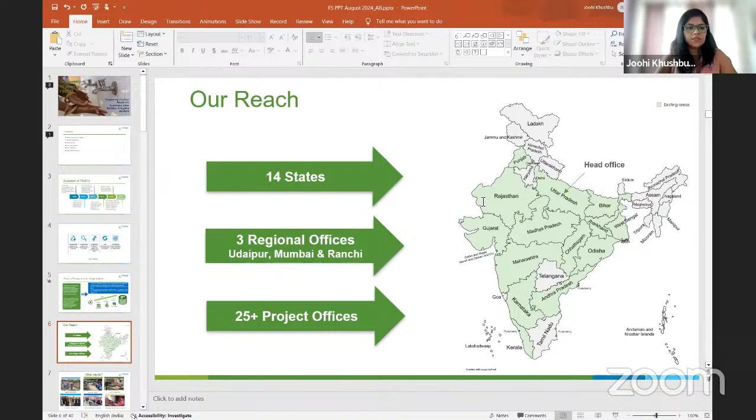So what we do is, as I said, we not only facilitate in constructing individual household toilets, but we also expanded into providing toilet blocks in schools, separate for both boys and girls, and not only toilets but also creating an ecosystem of hand washing and personal hygiene, MHM in schools and also in communities.

We also expanded or diversified our operations in waste management. In waste management, we are doing different aspects like municipal solid waste management, working with ULBs, liquid waste management, drain treatment, lake treatment, grey water treatment, and we provide technical support for developing STPs, sewage treatment plants. Another interesting thing we are doing is fecal sludge management.

An interesting thing we are doing here is collecting household organic waste or animal waste, and mixing it with the human waste coming into the STPs. We treat it into a very nutritive co-compost, which is supposed to enhance soil fertility. This has been tested in several agriculture universities and laboratories for testing and approval, and we have piloted it in some regions of India, giving good results for crop production.

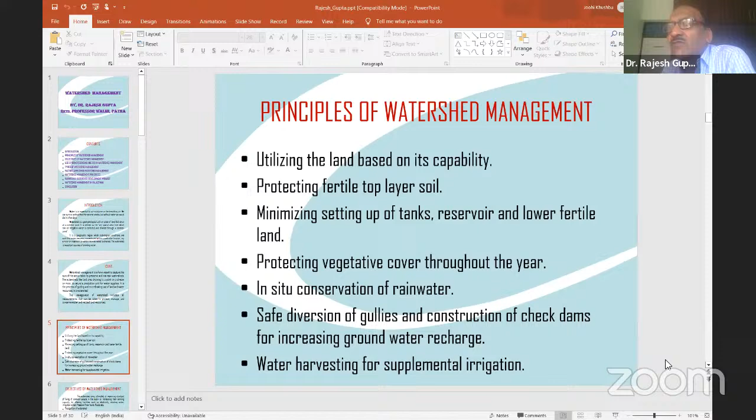Water harvesting is for supplemental irrigation. At the time of rainy season, we get water from the rain, and when it is stored, it can be used at another time.

The watershed aim ultimately is to improve the standard of living of common people in the basin by increasing their earning capacity. Like the Anna Hazare example - before watershed management there was no livelihood in those places, but after storing water, greenery came and livelihood started. For that, the Government of India gave a Padma Shri Award.

Everywhere water is stored, greenery comes up and new avenues are generated. So we recognize the watershed for adequate water supply for domestic, agricultural, and industrial needs, abatement of organic and inorganic soil pollution, and to protect and enhance water sources originating in the watershed, increasing infiltration of rainwater. The main purpose is to increase infiltration - whatever rainwater falls on the ground should be infiltrated into the ground.

Before remote sensing, it was difficult to delineate the watershed because a watershed is a very big entity. With remote sensing and satellite help, we can delineate the watershed - big watersheds contain smaller watersheds, and remote sensing helps us know where vegetation is, where the ridge boundary is, and from where water will be stored.

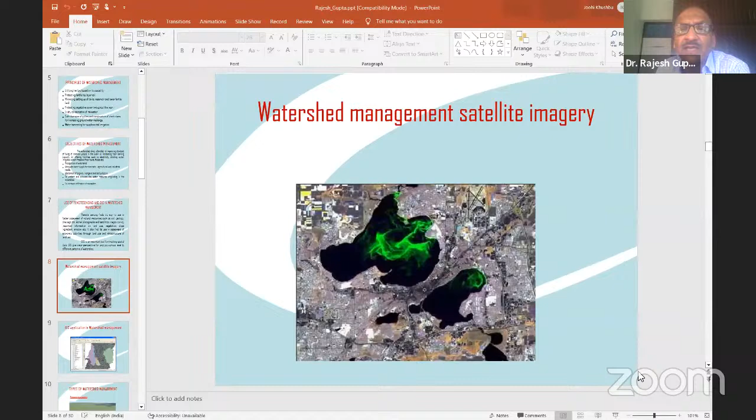With remote sensing and GIS, Geographical Information System, all ground data can be fed in, and relationships between different features can be easily understood. This makes it very easy to know the present position of the watershed. This figure shows remote sensing data - the black area is the water available at that place.

This is the grassland development. First, we have to develop the grassland. As we increase the grassland, the water infiltration capacity will increase tremendously. So we have to increase the grassland, either manually or otherwise.

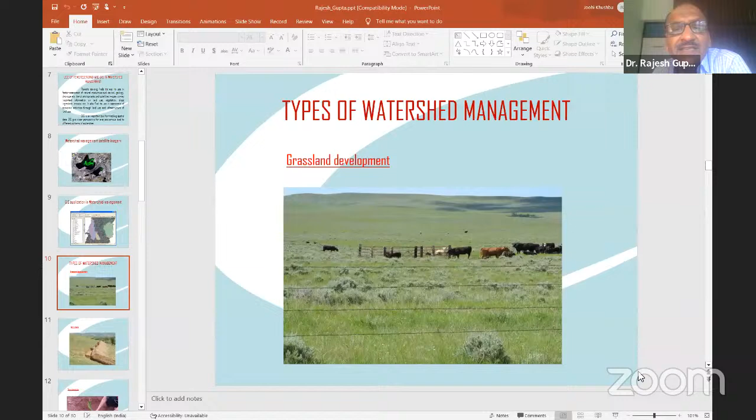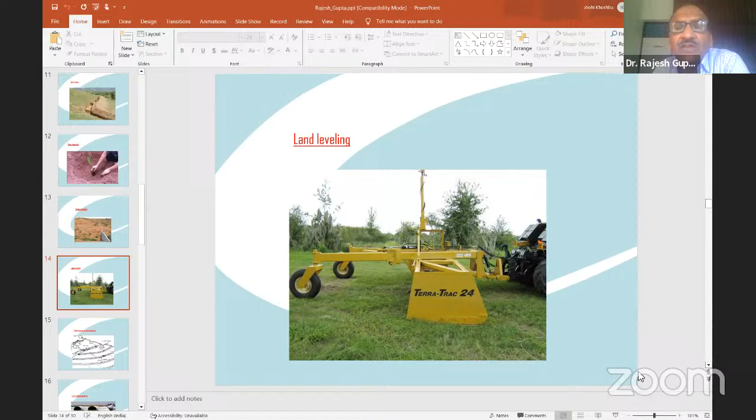Next, this is planing, this is land leveling. When there is an undulation of land, we use a tractor to level the land and maintain this level.

A watershed has different characteristics: size, topography, soil relief, climatic conditions, watershed operation, land use pattern, social status of inhabitants, and water resources and their capability.

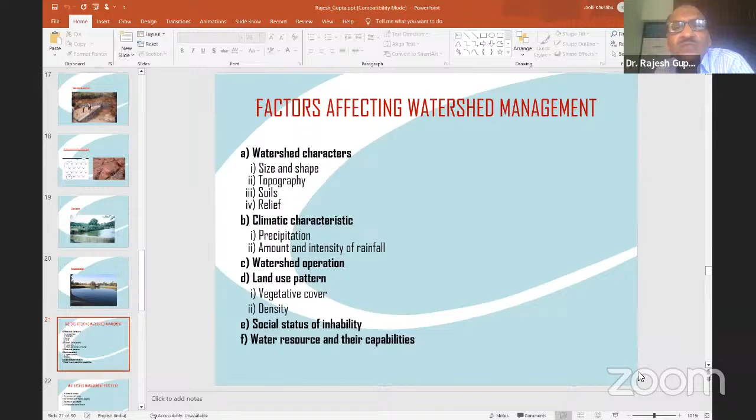When we study the watershed, we consider the purpose for which we are using this water, whether to increase infiltration, to increase water holding capacity, or to prevent soil erosion. For all these, different methods have to be used.

Suppose that is a vegetative measure. You have to provide some vegetative measure so that the watershed's water table increases. Strip cropping has to be done, grassland farming has to be done. Woodland engineering measures, some structural measures such as check dam, gully plugging, contour bunding, terracing, construction of earthen bank, and construction of check dam, anything which can be done so as to retain the water in those places.

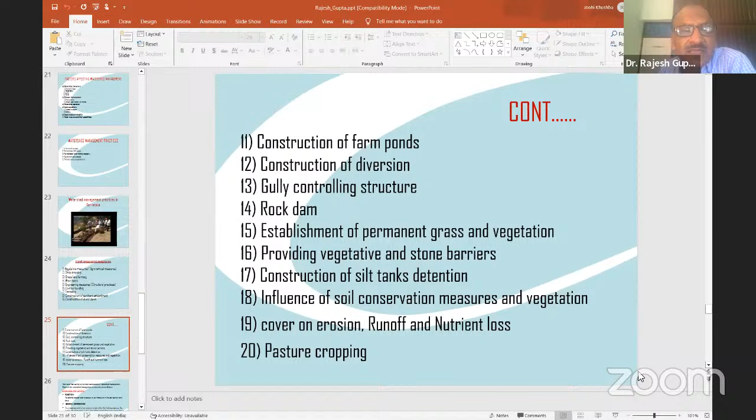Construction of diversion, gully controlling structure, rock dam, establishment of permanent grass and vegetation, providing vegetation stone barrier, construction of silt tank, influence of soil conservation measures, cover on erosion, runoff and nutrient loss, and pasture cropping, to control the erosion and to conserve soil moisture during the rainy season.

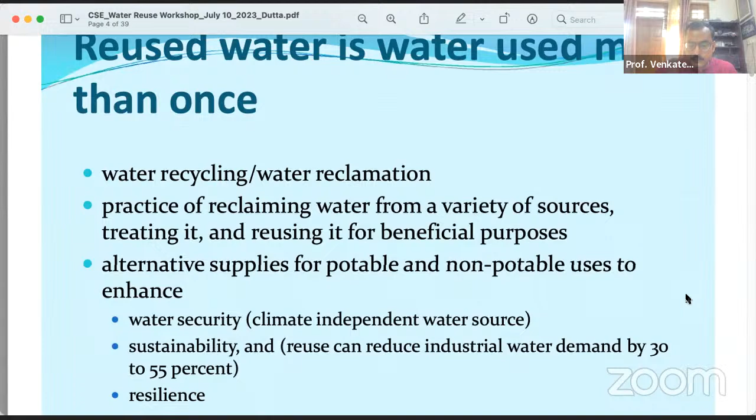There is a famous quote by Dr. Lucas, who was at the National Institute of Water Research, South Africa. He said that water should not be judged by its history, but by its quality. Because water is coming through various sources, we should not know from where it is coming. Especially in many places, if you tell someone this water is sewage, now you are drinking that treated water, it matters. So he's saying water should not be judged by its history, but by its quality—the quality and wholesomeness of water that you have in your tap, or when you go swimming, bathing, or for any recreation. You should know that this water has passed through multi-barrier systems before coming to this place.

It is also very important that most of us are a downstream community. For example, Agra and Delhi: Delhi is upstream and Agra is downstream. So whatever Agra people are getting, they are getting the wastewater of Delhi in the Yamuna River. The freshwater inputs are very less. So in Agra, what you see is the discharge of all those big drains, especially in the lean season. The quality of water is all dark, black water, sewage. So if you ask, everybody is a downstream community. If we are upstream, we are lucky because we get water from somewhere else.

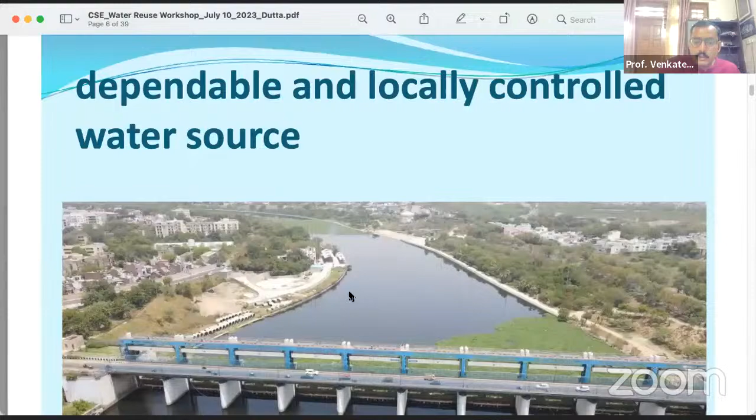So there are many cases of water reuse. Some happen through planned ways, and some happen unplanned, unintentionally, like the example I showed you here, where wastewater is going downstream and becoming the water source for someone else. This is unplanned water reuse, where the source of water is substantially composed of previously used water, such as when communities draw their water supplies from rivers like Gomti and Yamuna, or use water intake for irrigation from the Kali River. A lot of water from the Kali River in Meerut and other places in Western UP, the Hindon River, Kali East and Kali West, this dirty, polluted water is being used for irrigation by local farmers. That is an example of unplanned water reuse.

But there is also planned water reuse, where the water system is designed with the goal of beneficially reusing a recycled water supply. For example, a dual water supply with indoor reuse such as toilet flushing. Many colonies have dual water supply where reclaimed, reused water is used for flushing toilets and for landscaping and gardening. Similarly, there are colonies where lake restoration is done using reused water. In Dwarka sub-city in Delhi, there's a lake project where discharge from the Dwarka sewage treatment plant feeds the lake, and even in NCR, Haryana, some lakes are being fed by treated wastewater. This is a very good example of lake restoration. We are also trying to revive some old channels of rivers by putting in treated wastewater. So there are many examples of using reclaimed water to revive the ecosystem.

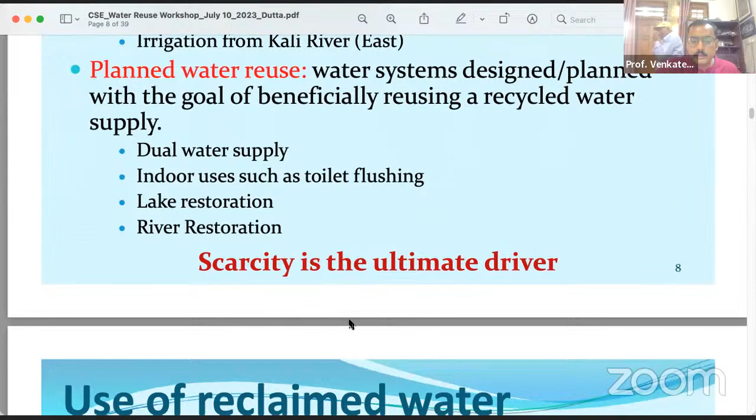Basically, scarcity is the ultimate driver of water reuse. Whenever there is water scarcity, there is a tendency to use that water. So I'll show you some examples of where we are using reclaimed water, and we did some work on the cost, the benefit, the health hazards and uses, and also the public acceptance.

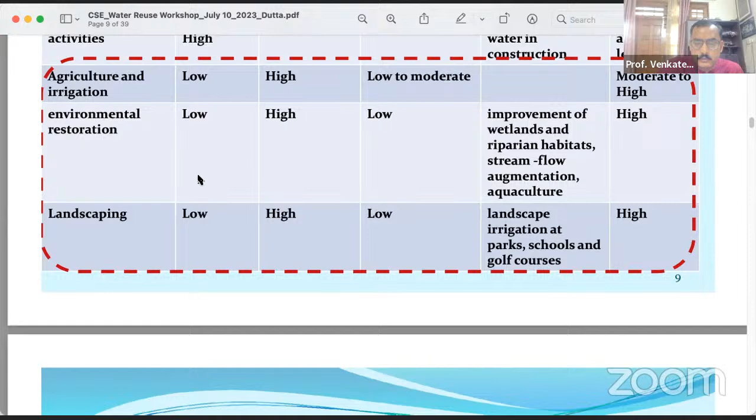If you see this table, potable water supply has a very high cost and very low public acceptance. Groundwater replenishment, when we recharge with treated wastewater, has a very high risk of pollution and high health hazard. I would not recommend using treated wastewater to replace groundwater; it is very risky. Some managed aquifer recharge is done in the US, but that is a highly controlled system. In India, many people are doing it, but I would say this would pollute the aquifers. In industrial processes, the cost is high but health hazard is very low, and we use it in power plants and refineries. For construction activities in NCR, we use treated wastewater for building purposes, though there's low acceptability due to absence of legislation. But three applications are very important, where the cost is low and public acceptability is high: agriculture, environmental restoration and landscaping. There's a huge scope of reusing treated wastewater in these three sectors, and the health hazard is also very low to moderate.

I've tried to show this with cost figures also. Ventures like potable water supply and groundwater recharge are costly, but for these three sectors, the health risk is less and the cost is also less. So we could go for these three.

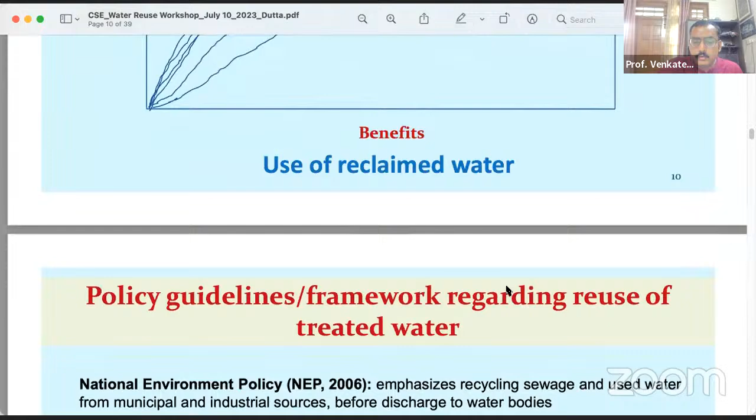I'll quickly touch upon the policy guidelines for water use in India. We had the National Environmental Policy introduced in 2006, which emphasized recycling sewage, but it had no building blocks. This was followed by the National Water Policy, which also mentioned using treated wastewater for non-potable purposes like irrigation, industrial processes and cooling, but again there was no supporting legislation or building blocks. Then the Ministry of Urban Development introduced a model water reuse regulation, which was very important. This regulation sought safe and sustainable water use, focused more on urban areas, and outlined standards and guidelines for the treatment and reuse of wastewater. It provided a framework for regulating and monitoring water reuse practice. So for the first time, in 2018, we came out with a very clear-cut guideline and standards, but again it was not very specific to industries.

Then there was the service level benchmark, SLBs, by MoHUA, Ministry of Housing and Urban Affairs, which mandated around 20% compulsory reuse and recycling in urban areas. We set up the benchmark that at least 20% of sewage should be reused in urban areas, and this is being followed in master plans of upcoming cities. We are also gearing up to meet this requirement. Like in Lucknow, we are making a plan for reusing at least 20% of recycled wastewater.

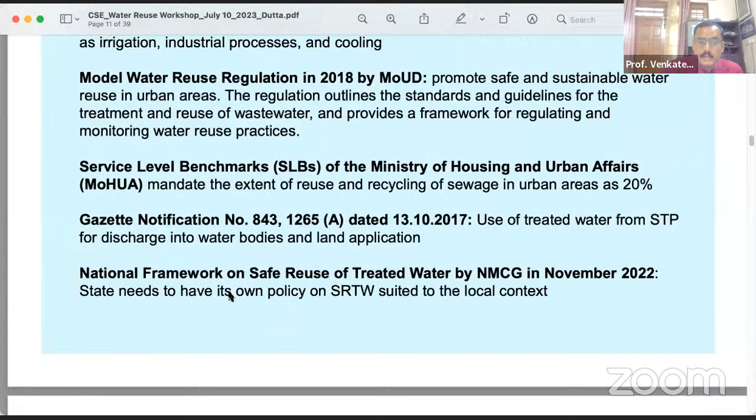Then we had a very important gazette notification in 2017, which mentioned the use of water from STPs for discharge into water bodies and land applications. This was very important, and we are using this gazette notification frequently for reclaiming and restoring our rivers and water bodies, because this was the only regulation wherein we could use treated wastewater from STPs for our lakes and wetlands. Otherwise, even the CPCB will not allow using treated wastewater for lake reclamation.

Then in November 2022, there was a very nice national framework on safe reuse of treated water by NMCG, National Mission on Clean Ganga. And now states are making their own policies, the safe reuse of treated wastewater policies, based upon these recommendations.

There was this advisory by CPHEEO, Ministry of Urban Development, in August. This is a very important advisory. It said to impose a ban on use of potable water for purposes other than drinking, and introduce a new workable system to restrict use of potable water for drinking only. Use of water for all other remaining purposes, to the extent feasible and not detrimental to human health and well-being, has to be made available through recycling and reuse processes, and should be augmented in a big way to meet the existing growing needs of urban clusters. So for the first time, there was this advisory on conservation and restoration of water bodies, and it said to impose a ban on use of potable water for non-potable purposes.

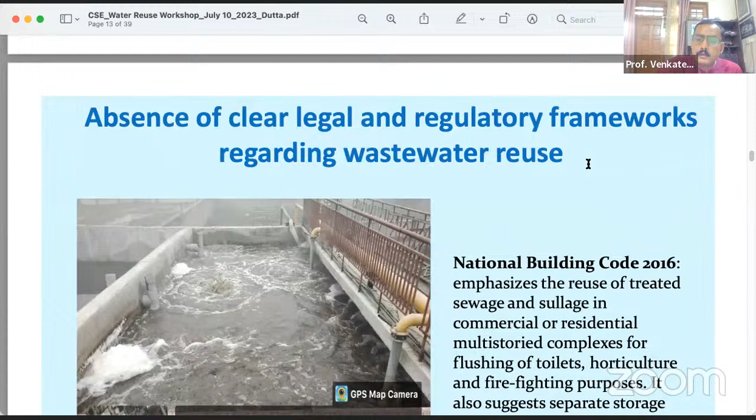Earlier, there was a clear absence of any legal and regulatory framework, but now slowly we are bridging this critical gap between policy and practice, between the legal and regulatory framework and the actual on-ground situation. So we had a national building code.

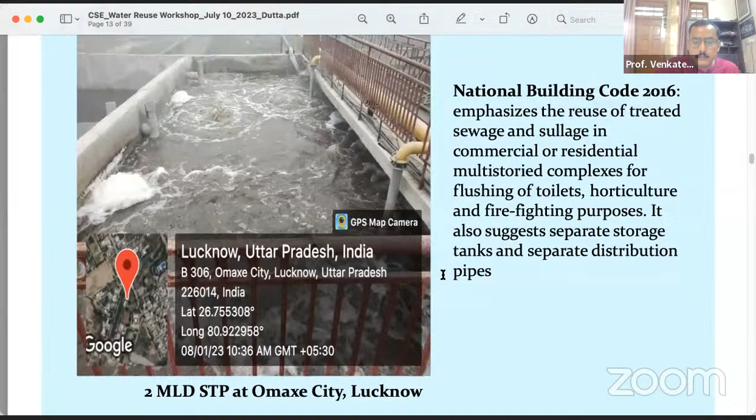The NBC emphasized reuse of treated water for firefighting. This is an example from where I stay, in Lucknow. We have made a 2 MLD STP, and this STP's treated wastewater is being used to discharge into this lake. Of course, now it has been stopped for the last year because the STP is not working properly, the builder is just dumping it into a nearby drain. So we have complained about it. But earlier, there was a very nice system of discharging this 2 MLD wastewater into this reclaimed lake.

So lastly, we have to work on technology that works, technology that promotes safe, reliable and cost-effective reuse of wastewater. The scale is very important, the quality is important, and so is the capital cost for installing and the O&M cost. We have to look for certain financing because the return is delayed. We don't get immediate return, but the benefit you get is very high. There are some risks like cross-contamination, but we are working on those risks as well through a multi-barrier treatment approach.

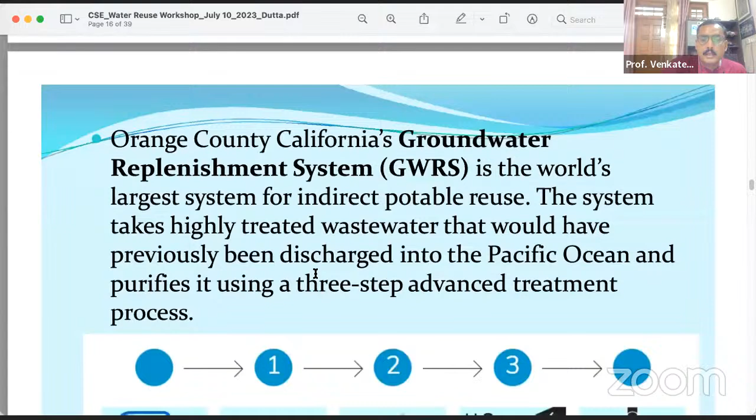So here are some examples. The Orange County in the US, where there are multiple systems of treatment: pre-purification, then microfiltration, RO, then UV, and then it goes to water delivery. This wastewater is used for drinking, and there is no incidence of any pathogen outbreak. People enjoy drinking the treated wastewater because it passes through a very strict treatment protocol.

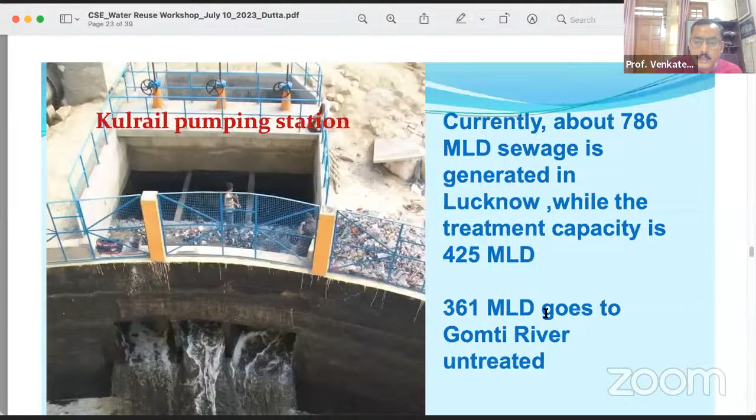So here are some examples of what we are doing in Lucknow. We are using stream augmentation. This is the Kukrail River. We are using treated wastewater from the STP, the Kukrail pumping station, where the water is diverted to the Bharwara sewage treatment plant. But currently, about 361 MLD goes to the Gomti River untreated, which is of course under process.

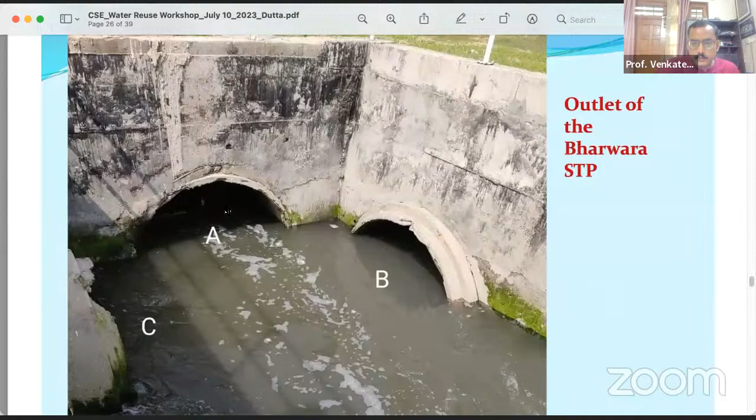This is the Bharwara treatment plant. There are 3 units, each around 115 MLD, so 345 MLD of wastewater goes through these treatment units, and this is the outlet of the STP. But the outlet quality is still not so good. You see, this is the place where they mix the water into the river, and there's a lot of froth formation.

Even this is at the outfall, because there's so much of nutrients in the wastewater. Even our treatment plant is not able to treat it properly, and here we need a solid technology intervention where we could get rid of the nutrients and phosphates, which result in this froth formation. All those surf detergents that we use, the surfactants, lead to a lot of froth formation. So treated water being discharged to the Gomti River is not of good quality.

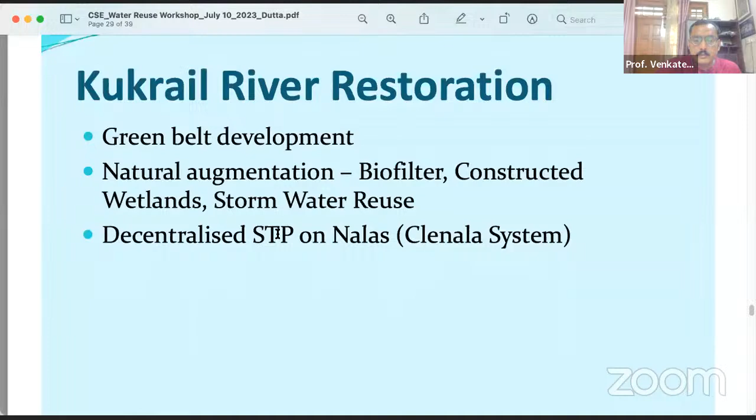So these are examples of using reclaimed water. We have designed a Clenala system, putting STPs on the nalas, using biofilters and constructed wetlands, and reusing it to reclaim these channels. So these are some of the pictures.

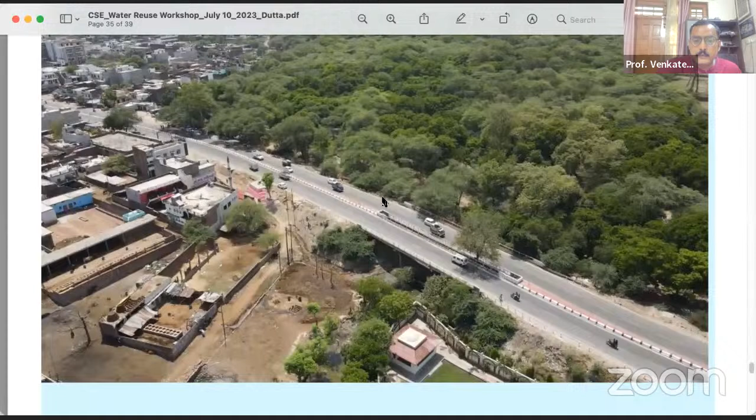This, of course, has now been removed. This is Akbar Nagar 1 and Akbar Nagar 2. This was the settlements on the floodplain of the Kukrail River. This is now there—this is the original patch in the Kukrail forest. We are trying to put all this natural vegetation across the banks of the river. This is the place where the Kukrail River comes from, the Kukrail forest.

So there are 5 major challenges. One is the cultural and social acceptability of treated wastewater, the health concerns, the infrastructure, and the technology challenge—how do you take care of complete treatment like Orange County is doing in California.

So we don't have enough money—the financial sustainability is very important. And finally, legal and regulatory challenge, which mandates compulsory water treatment and reuse through a multi-barrier approach, and also enforces proper implementation mechanisms.

So what needs to be done? Establish differential quality standards fit for the purpose of end use, which is not there. Develop state policies and municipal regulations. Right now only 10 states have drafted their policies. We are drafting for UP as well, with clear-cut standards, and develop markets.

This is very important—unless there is a market for reclaimed water and incentive compliance, your whole structure would collapse. So how to develop that market? Like in NCR, there is a market for treated wastewater for buildings, because it was mandated by law that you can't use fresh groundwater for building purposes. So you have to have treated wastewater. There are fleets of tankers that get treated wastewater from the treatment plant and distribute it to the builders.

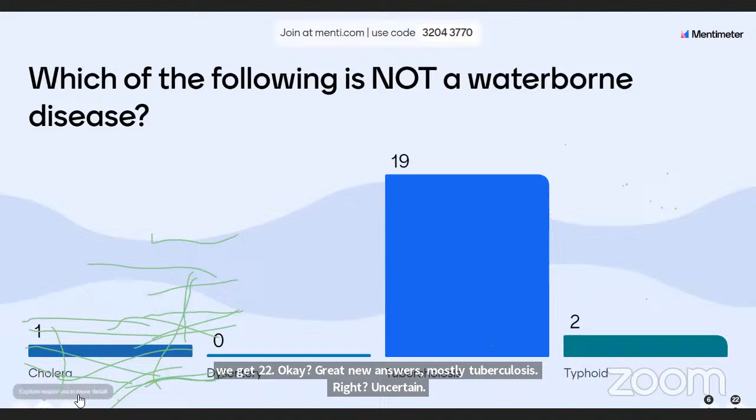Okay, great. New answers. Mostly tuberculosis, right answer. So tuberculosis, most of the people have answered right. So this is, we at least know, like wash का हो रहा है तो at least ये पता होना चाहिए। So yes, water sanitation. So good, good, very good. Thank you. Next question, Anil ji.

अच्छा. So what is the term used for the process of removing harmful substances from wastewater? जो अभी वेंकटेश सर ने जो बोला, जो डॉक्टर गुप्ता ने भी जिस पे हाईलाइट किए थे कुछ, सो प्रोबेबली इफ आई एम नॉट रॉन्ग इन सम केसेस, सो वेस्ट वाटर मूवमेंट को क्या बोलते हैं हम लोग? रिमूवल ऑफ हार्मफुल सब्सटेंसेस फ्रॉम वेस्ट वाटर। ओके, ट्रीटमेंट, फाइन, ठीक है। 5 आंसर्स आ गए, ट्रीटमेंट। 6 काउंटिंग, ओके, 9।

क्लोरोनाइजेशन। आई डोंट नो, आई मीन लेट्स सी, वो देखते हैं। I mean, let's see what the answer might be. Okay, 15. Great. Very quick. अभी तो आपको you should be in the mood of the game. अब आपको क्लोरोनाइजेशन, just I don't know. I mean, I will देखते हैं। तो एक बार 20, 21 responses, 22 responses we are getting।

ओके, 18 पे स्टक हो गया, ठीक है। बाकी कंफ्यूज है शायद। 19, 20, अच्छा ओके ओके, यस श्योर हो रहे थे। Okay, 22. Okay, so we get most of it. So 18 says treatment, and I would say the right answer is treatment. Yes, of course. Yeah, treatment. So we can move to the next question.

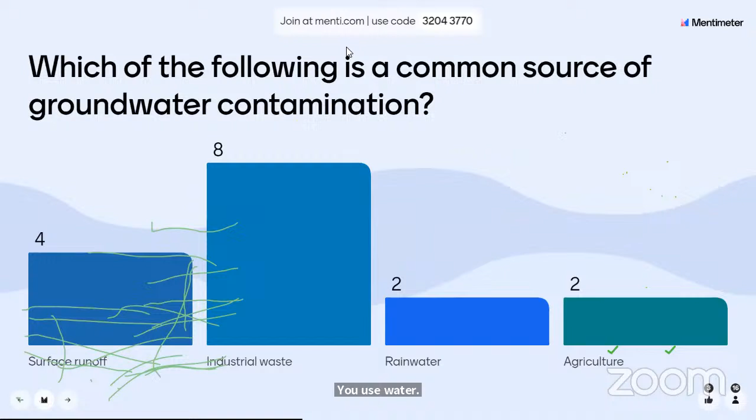We register that, thank you. Rajendra Nayak ji says surface water, okay. So what we can see is we have received 21 answers and majority have answered it rightly - industrial waste. Because we have learned that rainwater is actually required to go into the land, which was all about Dr. Gupta's presentation, how rainwater should go into the land and how we can recharge the groundwater. So that is it - industrial waste is the right answer. We can move to the next one.

Which country has the highest number of people without access to safe drinking water? Safe drinking water, mind it - access to safe drinking water among these four. Sorry, without access to safe drinking water. Very sorry, without access to safe drinking water - those who do not have safe drinking water. Someone thinks it's China. So we think China probably has better development standards, but yes that is there - that is also very questionable. But then again, okay.

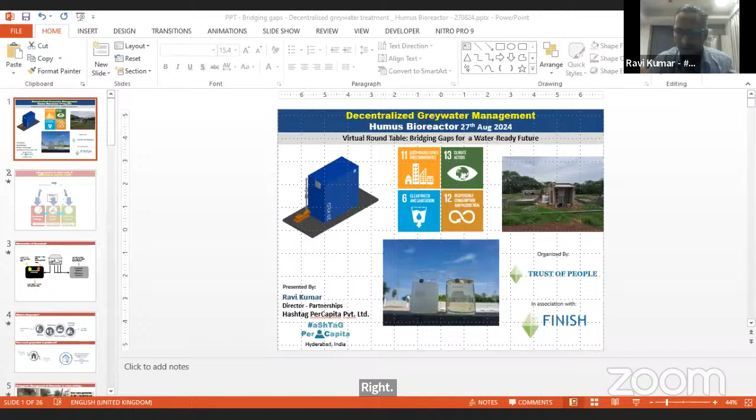Yeah, thank you. So thank you, Finish and Trust of People, and Chandra sir, for following up and wanting us to be in this event. So I'm Ravi Kumar, and Ms. Juhi has already introduced me. Today I will be speaking about decentralized grey water management. I'll start with the basic concept of grey water management - what is grey water and what's happening currently with it - and what our treatment solution offers for grey water treatment and reuse. So that will be the broad overview of my presentation today.

Yeah, I'll proceed with it. So we have wastewater, which of course has many sources like domestic, industrial wastewater, agricultural runoff and others. For today's presentation, I'll be specifically talking about the wastewater coming out of households, which is also termed as domestic wastewater.

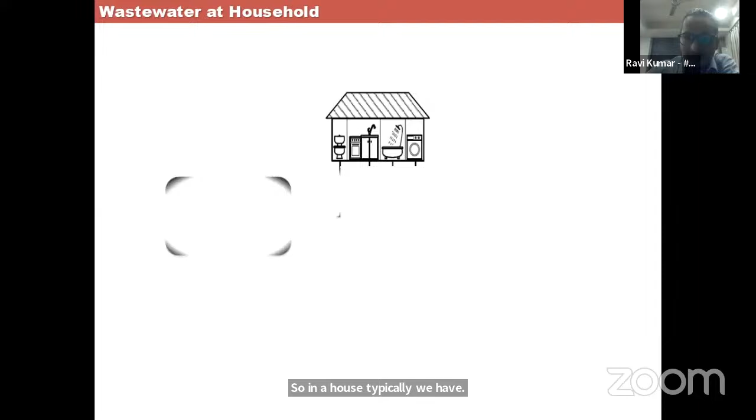In a house, typically we have two types of wastewater generated. One is from the toilet, also termed black water or toilet wastewater. What does it contain? It contains 1 to 2 liters of urine per day per person, and fecal matter of 100 to 400-500 grams, depending on the country.

Apart from this, we have the flush water from pour flush and other flushing systems. Depending on the system, 10 to 25 liters is typical for Western toilet flushing, and pour flush uses less volume. The other wastewater, from kitchen, bathroom, and laundry, is termed grey water.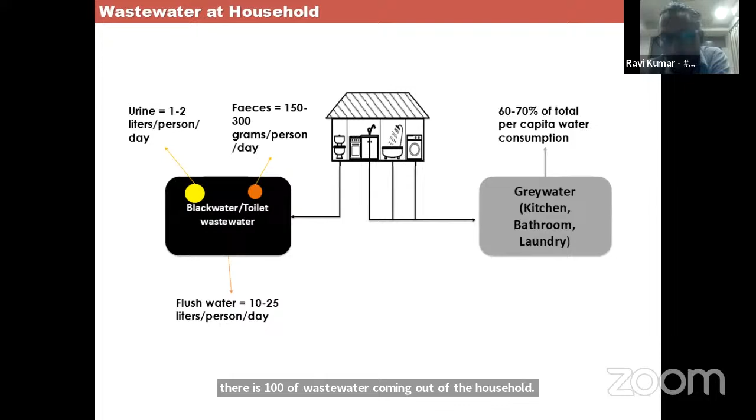If there is 100 liters of wastewater coming out of a household, 60 to 70 or mostly 80% of it would be grey water. The wastewater from kitchen—cleaning utensils, wash basins—and from bathrooms and washing clothes and utensils, is termed grey water.

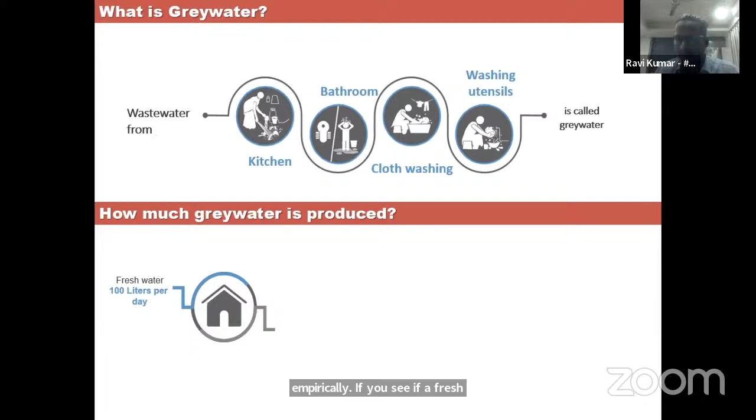How much is produced? It's not a clear measure, but empirically, if 100 liters of fresh water is supplied per day per person, approximately 70 to 80%, or 60 to 70 liters, will be the grey water generated.

It is estimated, according to sources from the central government, the Swachh Bharat Mission, and Grey Water Management in Jal Jeevan Mission, that the amount of grey water generated in rural India is about 15,000 to 18,000 million liters. That's a huge volume.

This grey water is less contaminated compared to toilet wastewater, because most pathogens and organic matter entering wastewater come from toilet wastewater, which has a lot of fecal matter containing pathogens and organic matter. But grey water also contains some organic matter from the kitchen and some sodiums and other contaminants from washing clothes and utensils.

So what is happening currently? Where is our grey water going in our cities, villages, and other areas? The wastewater is basically getting into open areas wherever there are no drains, or wherever drains exist but are not connected downstream to any treatment system. Generally they end up in open water bodies, getting collected in open areas or water bodies.

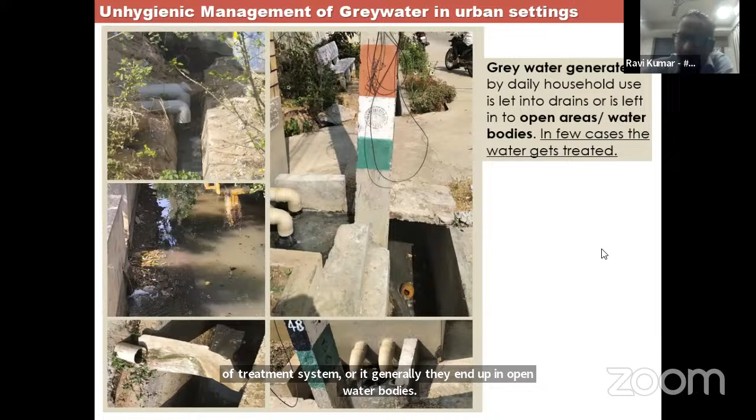Once it gets collected downstream in open areas, especially in our cities, we have issues with mosquitoes and unhygienic conditions. Sometimes the site turns anaerobic and starts smelling. Most of our drains, along with grey water, storm water, and solid waste, get accumulated and create a lot of menace. This has caused a lot of issues.

Just before the rainy season, or once the rains come in India, we have dengue, chikungunya, malaria and all. I was also affected with chikungunya from mosquito bites. It's not that there's water right around my neighborhood, but stagnant water in our surroundings causes a public health issue. It has to be ensured that the water gets treated and doesn't accumulate in our areas.

In most cases—so the picture on the right here, we are doing a lake project in Chitradurga, Karnataka. What we have seen is all the stormwater drains are ending into downstream lakes or rivers. In some cases, the grey water is mixed with the storm water; in other cases, it runs separately.

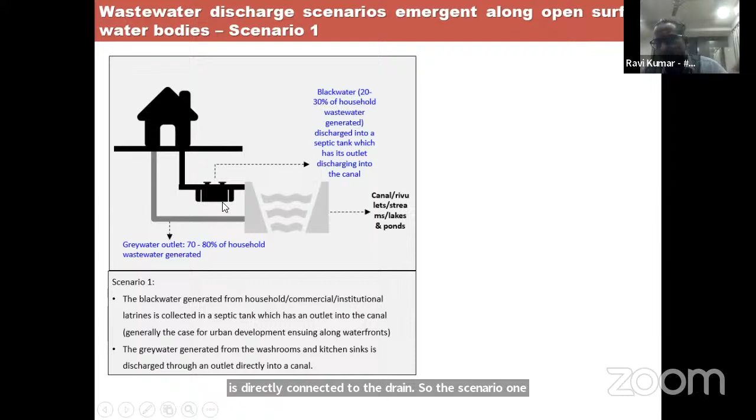All the gray water and black water is collected in a sewer pipe, and from here it goes to a centralized treatment system, a sewage treatment plant. From there it gets treated, and in some cases - though I think the reuse percentage, as Professor Venkatesh Dutta was mentioning, is quite less in the Indian context - there are some reuse cases as well. All the wastewater gets collected at a centralized location with a sewage treatment plant, gets treated, and is disposed into rivers or streams, etc.

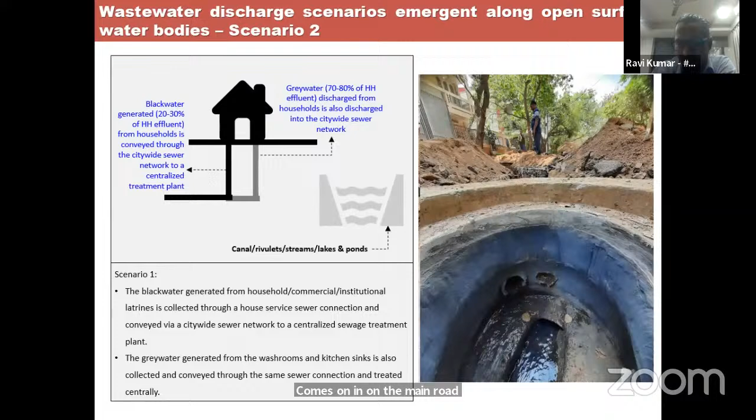There is another scenario which is very prevalent, and I don't know the exact numbers because the scale is huge, where all the black water and gray water end up in open drains. These drains end up in downstream water bodies - lakes, ponds, rivers, whichever path the water takes downstream. So these are the kind of scenarios: centralized systems, gray water collected directly into the drain, or black water into the pit. The third scenario is where both gray water and black water enter open canals and water bodies.

I'll try to give you what could be the approaches for these kinds of scenarios - this is a very generalized one, it can be applied anywhere, not specific to any treatment technology. In the existing scenario, all the gray water is directed into the drains and mixes with solid waste. It either collects there during the dry season, and once there is heavy rain, it gets washed away into downstream water bodies, or it causes flooding - all the drains overflow in the rainy season. In the dry season, solid waste collects, leading to mosquito breeding and other health issues.

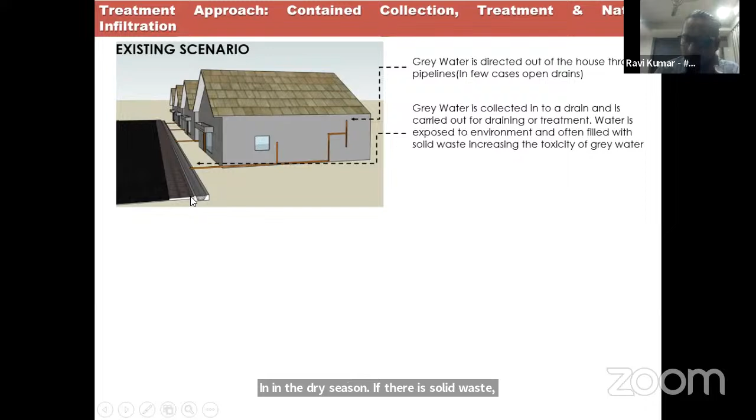So what could be done?

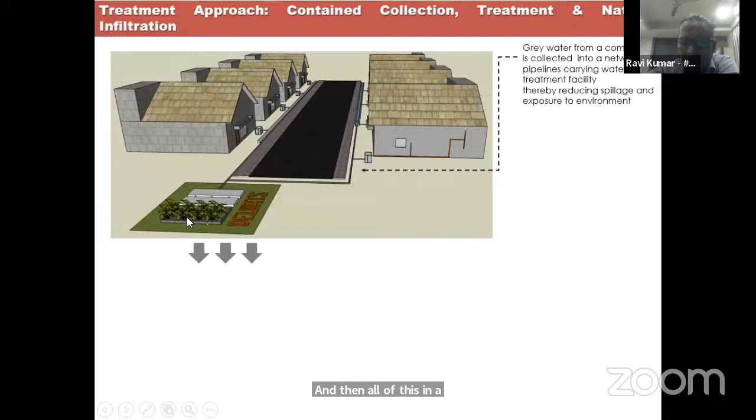A proposed solution could be to have an interceptor so that solids which settle from the household get collected into the stormwater. Any sediments coming from the house could be collected in this interceptor chamber, and from this intercepting chamber we basically try to avoid sediments getting into a stormwater drain or conveyance chamber. Then all of this in a community could be collected into a centralized location, where it can be treated with a nature-based system.

Here I'm taking an example of DEWATS, but it can be a wetland system, a phytorid system, or any conventional system as well. You treat it, and then you let the water go downstream, but don't let the polluted water go through—only the treated water can be put into the water bodies.

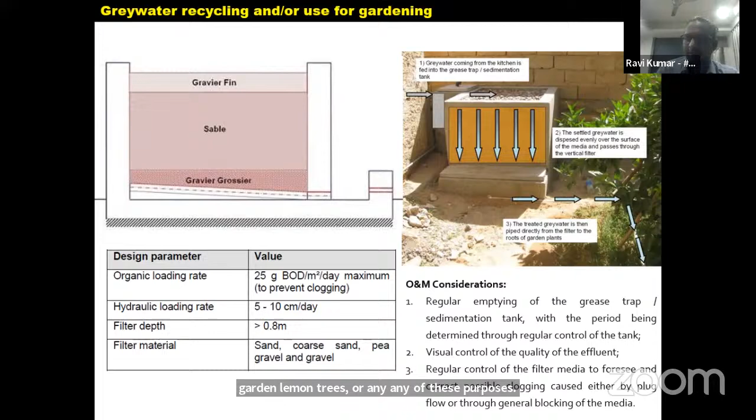But if there is enough space and a kitchen garden available, you can have a simple filter system to filter your gray water where organic matter degrades, and then it's sent to flowering plants or a kitchen garden, lemon trees, or other purposes—saving fresh water by using gray water instead. This is one of the systems as well, similar to the previous one.

So this was the overview of what gray water is, what happens to it, where it ends up, what approaches exist to treat it, and how we manage the gray water.

We at #PerCapita had developed a very novel and packaged decentralized treatment system for treating gray water from individual household to community scale—somewhere around 5 KLD up to 100 KLD. I'll be speaking about this technology, what it is, what the process is, and comparisons with other technologies.

Thanks to Finish Mondial and the team for selecting us as an innovative technology and awarding us the first prize in the Sanitation Hackathon of 2024.

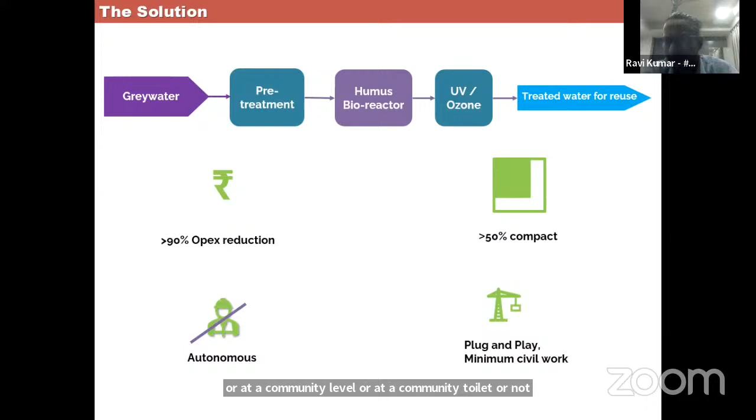I'll get into the details of the humus bioreactor treatment system. So what is the solution? The solution is basically that you have gray water generated at a household level, at a community level, at a community toilet, or at an institution like a school or commercial establishment.

So you have a pre-treatment which includes equalization—an equalization tank. Here we have a pneumatic pump where once the water reaches the top or outlet level, it is pumped into the humus bioreactor system. We can use a pump, or if there is enough gravity, we can also avoid the pump. Then I will explain further what happens in the humus bioreactor.

Then it goes into this bioreactor system. In cases of reuse for toilet flushing, we use UV or ozone. But if it's just for reusing into the garden, non-food crops, or trees, you can avoid using UV and ozone, and then the treated water is directly used for reuse.

What is unique in our system? Compared to any conventional system with mechanical systems such as ASP or SBR, if you are familiar with those—these systems use aeration, which uses pumps for aerating the tanks where microbes are given oxygen so that they can feed on the organic matter.

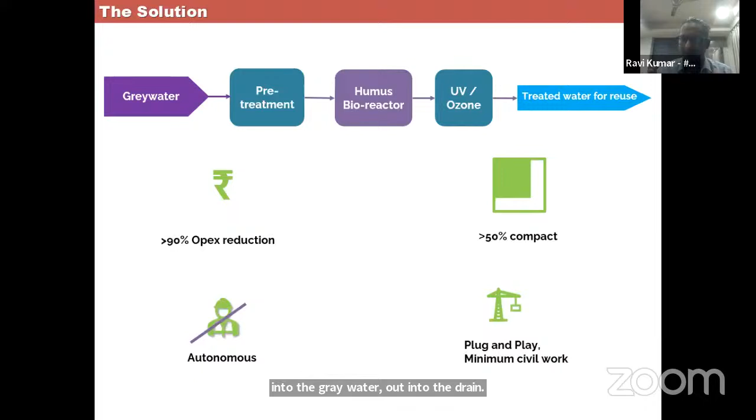And plug and play, what do you mean? We just have this module. If there is already an existing plumbing system where the water is just flowing out into the gray water drain, we can bring the compact system, put it into the ground, and the gray water which is disposed directly into the drain can be connected to this bioreactor system. Then the treated water can either be reused or let out into the open water bodies to reduce pollution.

So what's the difference between the conventional system and our system? If you see, so the treatment, you just need to understand the concept of wastewater treatment.

So wastewater contains organic matter. What is organic matter? Basically whatever we eat as food gets digested and comes out as carbon, protein, fats - these are the organic matter. That is further reduced, it comes out as carbon matter, rich in carbon. So basically that has to be reduced to the simple form of carbon dioxide and H2O.

So what happens is there are microbes in our wastewater, which are also in our gut bacteria. That bacteria feeds on the solid matter, and then it degrades the matter into a simple form. So in a conventional system, you need a high amount of bacteria, and bacteria needs oxygen. Oxygen is the energy for them - they get energy, they multiply, and then they feed on the organic matter, and the organic matter reduces, leaving clear water for us.

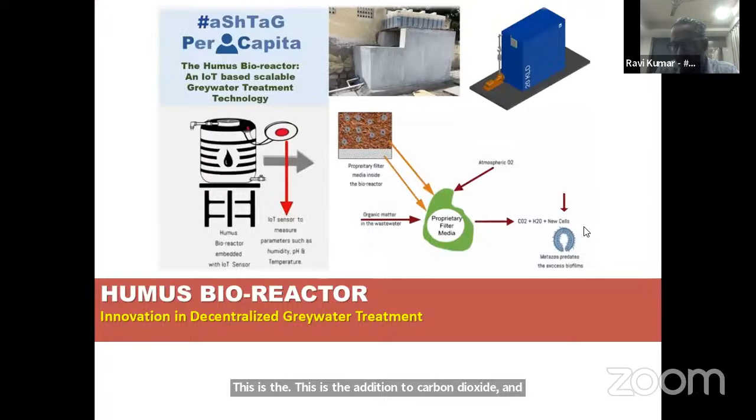Predation is basically, this is healthy biofilm, then it grows, and once it grows, it automatically reduces the volume of the biofilm. So this is another microscopic view.

Maybe someone's speaking, someone is unmuted. Hello, please mute yourself. Please go ahead.

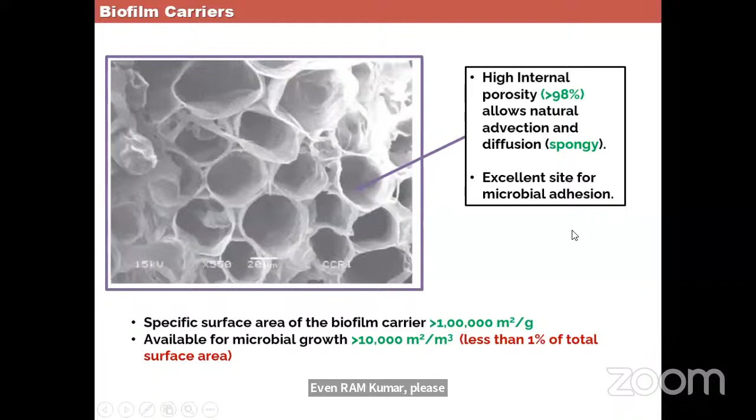It's becoming a little technical, but I'll try to simplify. So whatever I explained in this image, this is a microscopic view, and you can see 20 micrometers, that's how small it is.

So we have high porosity, and it's like a sponge, which allows a lot of bacteria to settle, and this further reduces and treats the wastewater.

So compared to any other system, this is a 50 KLD, 50,000 liters, 50 cubic meter capacity STP. So energy requirements, if you look at any conventional systems such as SBR, MBBR, or MBR, these are mechanical systems with very high energy needs. We have very low energy requirements, and this can be easily offset by solar panels, which is one uniqueness.

And land footprint is also very less, because as I explained the whole process, we don't have large tanks, we just have one reactor, which is plug and play. In terms of cost, because of the filter media and fabrication, you can see the cost comparison, and operational cost is close to minimum compared to any other system. So these are the advantages of our humus bioreactor system compared to any conventional system out there.

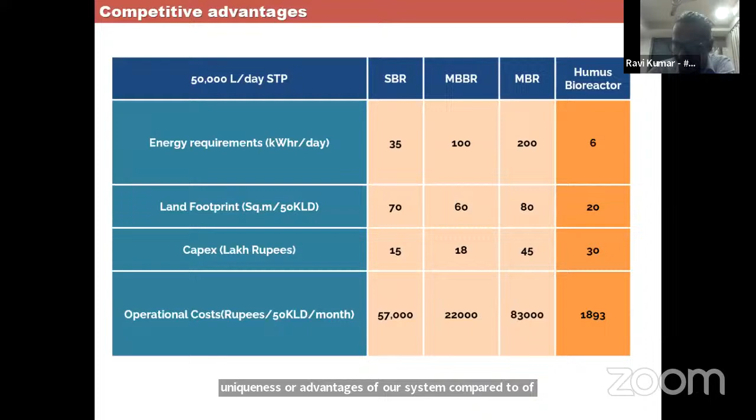So how did we start? We had a few lab experiments. We started with 10 liters of wastewater which we collected, and then we increased it to 100 liters per day of capacity. We started to see the temperature.

So there are a few other controls also. We have a device which gives us the pH and temperature to understand the biofilm, because all this bacteria have to be in certain conditions, like certain temperature, certain pH, and certain moisture content. So we use such devices to see the performance of our system.

And also all of this we try to integrate with an IoT based system where we could manage it remotely. So this was our first technical pilot.

In this case, we did use grey water. It is a community toilet in Trichy, where this is how the system was. This is a huge septic tank, of 20,000, 25,000 liters, never desludged. It was overflowing into the nearby river, and all the solid waste was dumped.

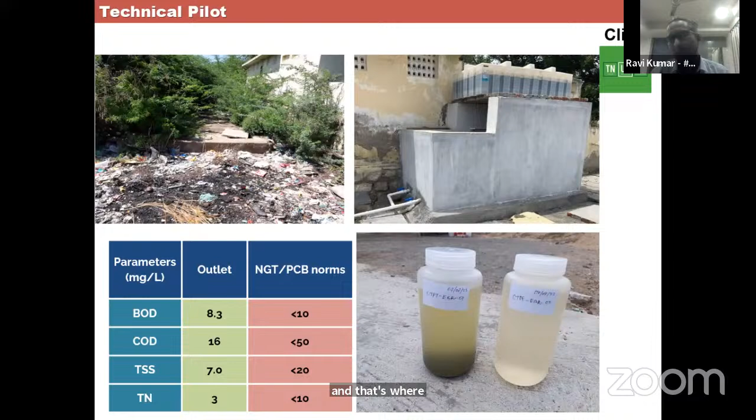And then this is where we did our intervention. The outlet of the water which comes out of the septic tank and the grey water from the community toilet were both connected to our reactor system. This is the equalization tank, and below is the reactor, where our first technical pilot was implemented, and where we found these results that made us very sure this system was effective compared to any other systems out there.

Right now we have two projects undergoing. One is in Calicut, Kerala, where we are putting a treatment system where there are already existing tanks. We are implementing the system in a bakery where a lot of organic matter comes, with a 10 KLD capacity, and another food industry in Andhra Pradesh, where it's treating dairy industry waste too. So it's not just grey water, it can be expanded to other applications.

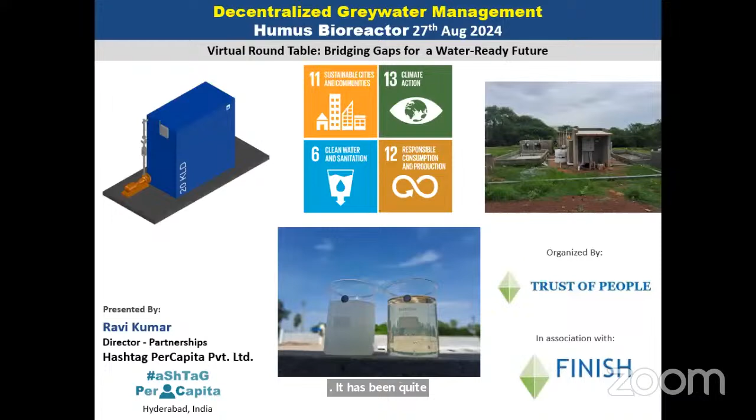If you have a question, you can definitely unmute yourself. One by one, we can take up questions. Thank you, very good presentation.

If nobody has a question, I have one. We have seen a very clear-cut comparison between your solution, your humus bioreactor, and the conventional system. So what I would like to ask is, what is the challenge or drawback you still feel in your system? Because I've seen that you have just piloted it in one place and now you're working in two places. So what are the challenges you still see for this solution to get accepted?

So the challenge is not specific to the process itself, good question. We don't see a specific challenge in the process. The process is solid, and we have done our experiments to come to this stage.

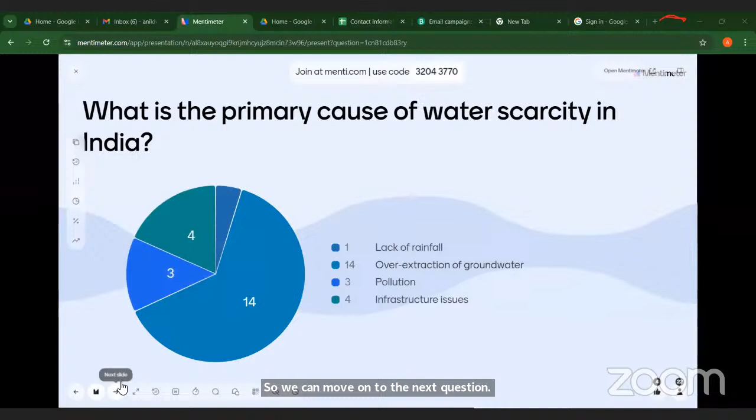Okay, Anilji, next question. Which of the following is a key indicator of water quality? We've heard this in at least the last 2 presentations, in Mr. Kumar's presentation and also somewhere in Professor Dutta's presentation. The options are temperature, turbidity, pH level, and color.

Turbidity. Okay, one says turbidity. Saroj Gorji says 2, that is turbidity. Turbidity, sir. Okay, turbidity, Lakshman Mishra noted.

Lakshmanji, turbidity. Okay. Color is interesting, which can also be another indicator actually. But yes, if the color is very murky and has mud mixed in it, we would easily know the indicator visually. So the one that isn't easily visible to the eyes, I have already answered - that is basically pH level. So pH level is the key indicator of water quality. Most of you gave the right answers.

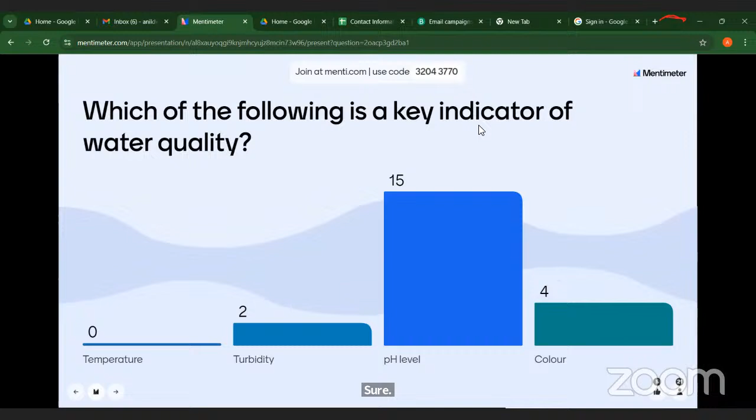Sorry, Shankadesh, sorry for interrupting you. Can we do some of the questions later also, maybe towards the end of the session, since we still have 4 speakers remaining? Absolutely, we can go over this again within the hour. Yeah, so Anilji, we'll present it again in the next slot. Thank you so much.

Okay, so we move to our next speaker, who is Mr. Stephen Birungi. He's Secretary, Technical Working Group of FINISH Mondial Technical Working Group, based in Uganda. He is also the WASH advisor at Caritas Portal, Fort Portal, and has vast experience in WASH solutions across Uganda and other regions in Africa and Asia. His expertise is key in advancing programs' mission to improving sanitation and hygiene. His insights include collaborative and innovative approaches taken to address sanitation challenges through a hackathon, which FINISH conducts every year. So yes, over to you, Stephen.

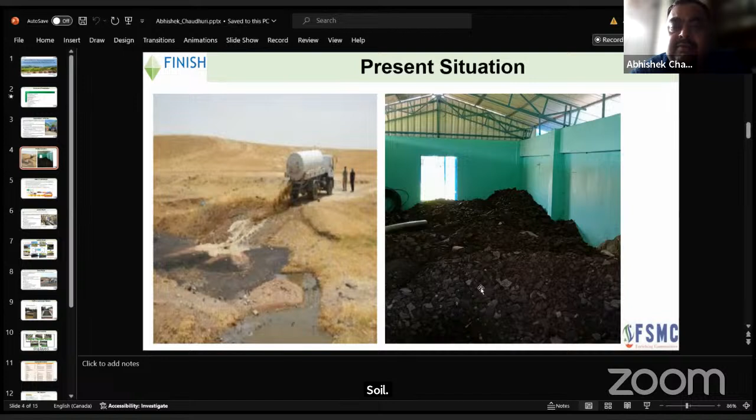So what we have tried to do is come up with a technology. Next slide, Anshuman.

We have tried to come up with a technology to address both these situations. Our focus will be on reuse, because instead of throwing this resource into the open, we can do some value addition and come up with something beneficial.

Abha Mishra ji, yeah, I'll just come to that. I'll tell you about the areas in Odisha, Abhaji - it's there in the next slide.

So to address these two situations, we have tried to come up with a product that is beneficial to the environment and to the climate. The technology we want to follow is very simple and can be replicated easily - even rural or uneducated people can be trained on it so this can move forward. Most importantly, our intervention or solution is totally nature-based with zero energy requirement, so it is energy efficient, simple, nature-based, and also very low cost. I'll take you to that solution as well.

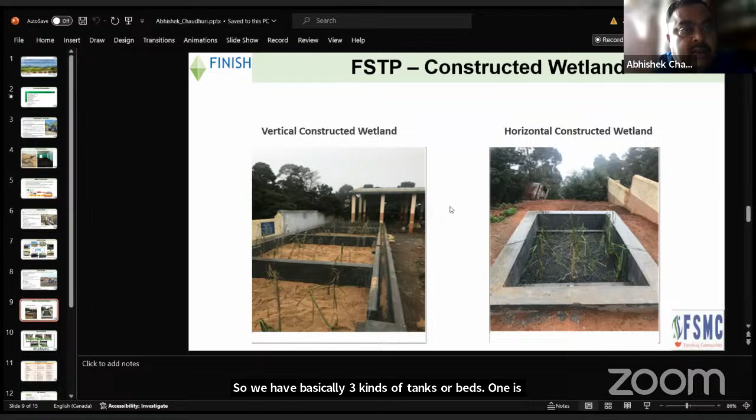This horizontal constructed wetland is a bed which has gravel filters, and it also has these phytoremedial plants - we normally use canna here. The water flows horizontally, and as it does so, it gets treated and finally gets collected in a collection tank. So we basically have 3 kinds of tanks or beds: one is the vertical, one is the horizontal, and then the final collection tank. So this water is getting treated in this way.

And then the solid part - you'll see it's getting taken out from the bed. This solid is mixed with organic waste, and we follow the windrow method for composting. In these windrows, further decomposition happens. During this decomposition, a certain temperature level is to be achieved, in which the pathogens and bacteria are neutralized.

So when we sieve the product, when it is ready and sieved, we have a comparatively safe product. I say comparatively because it has a certain amount of bacteria or pathogen, but which is below the safety parameters as per the parameters devised by us. Globally, we presently do not have parameters for co-compost, but we have come up with 22 parameters, which I think is in the next slide.

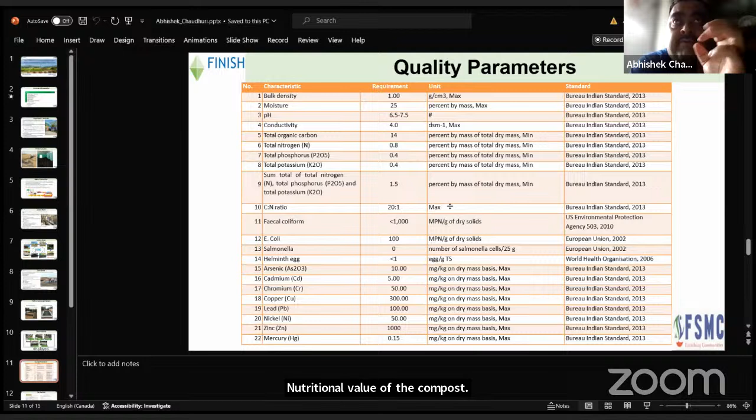So these are the parameters which our team of experts have come up with, which study the nutritional value of the compost, and also look into the heavy metal content and the bacteria and pathogen content in the co-compost.

To substantiate this, because we need to establish the product as a safe product, we are getting it studied by the Odisha University of Agriculture and Technology. They are doing a study on this product, growing ladyfinger, and will come up with the quality parameters of the product, the impact of the product on soil, the quality of the crop grown through application of the co-compost, and the ideal dosage of co-compost.

So our objective is, we are looking at this product not only as a reuse product, but as a substitute to chemical fertilizers. We want to do it on a large scale so that ultimately we can impact agriculture.

As you all know, soil quality is getting depleted. With the application of this co-compost, which can act as a soil conditioner, the soil quality can get improved. And finally, it also has a sponge-like quality, so it holds water. So this water holding capacity, if we keep on applying this co-compost, in a longer run it will impact the water consumption for agriculture as well.

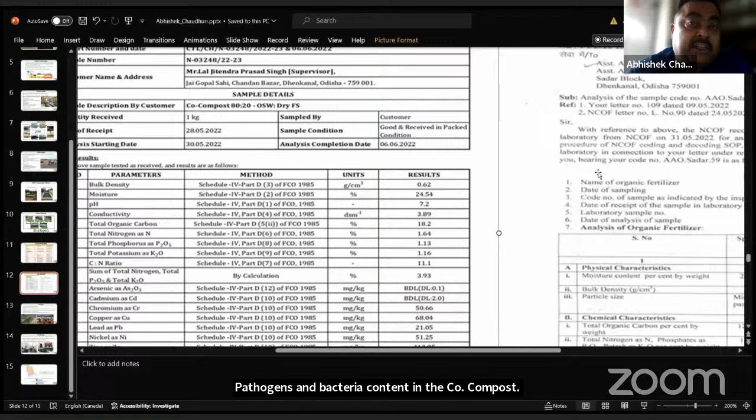But yes, there's no authority right now which can state that these are the parameters which can be considered. Presently, we are doing advocacy on the basis of these 22 parameters with the government. And not only with Orissa OUAT, we are also getting into a tie-up with NBRI, the National Botanical Research Institute in Lucknow. They will be doing a similar study for us, and will help us in neutralizing the pathogens and bacteria content in the co-compost through biological measures. That is a very interesting project which we are going to start with NBRI very soon.

So next slide, Anshuman.

So this is the impact which I was mentioning, that this intervention not only focuses on sanitation and reuse of biosolids, but also provides an additional revenue source to the ULBs. It also impacts climate and health, because it helps in reducing water and soil contamination and reduction of CO2 emissions. And the biggest impact which we foresee will be in agriculture. We can project this product as a substitute for chemical fertilizers, and it will also, in the long run, impact water consumption in agriculture.

And yes, of course, it also gives an option of livelihood creation, because when we are talking about taking this to a large scale, to every district, the people who will be involved in doing this co-composting and marketing work, you can see a lot of livelihood can also be generated through this. Also, our experience has been that women are majorly involved in waste management and treatment practices, so it also gives a very good platform for gender equality and social inclusion.

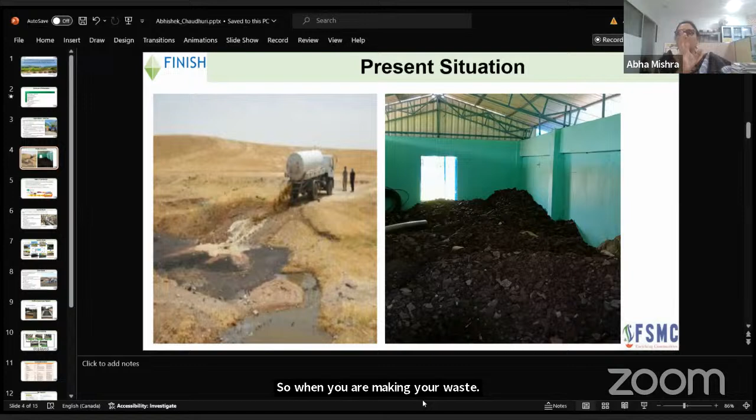So basically what happens is the bio waste which is coming in has some elements of plastic or other things. So when you are making your co-compost, how is the segregated wet waste being handled - are you getting it properly segregated? We are getting it properly segregated. That is our condition with the ULBs, because the labor is to be provided by them, so we make best use of their labor in getting the segregated wet waste. We only take the biodegradable waste from them. All plastic, paper and everything has to be segregated first before giving it to us. So they provide us totally pure segregated organic waste.

And Anshuman, if you go back to that Odisha model, there we have provided the list of ULBs where we are working in Odisha. So in Odisha, ma'am, we've just started with Cuttack now, and prior to that we were working with Dhenkanal. It's there - Cuttack, Dhenkanal, Jharsuguda, Belpahar, Nayagarh, Aska, Hinjilicut, Soroda, Kamakhyanagar, Bargarh, and Ranpur. So these are the 11 ULBs with whom we are working presently in Odisha.

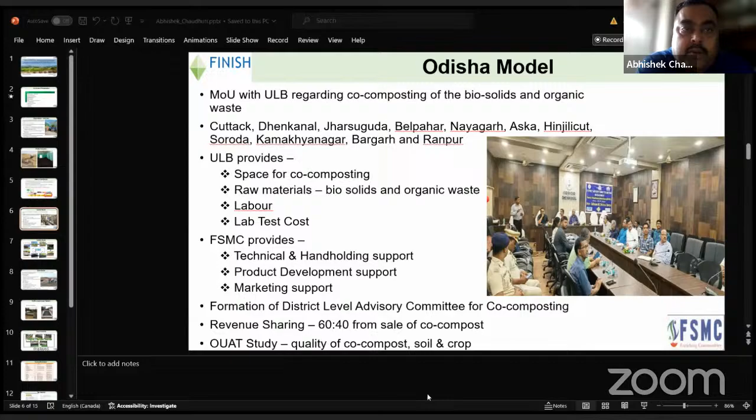Yeah, okay, any more questions, Juhi? Yeah, I think there is one more from FS Chirala, Nahida. She has asked something, but since we have less time, we can ask her to send you all these questions, we can email you these questions, or do you want to take this up quickly?

Yeah, Nahida, so what I mentioned is the co-composting process is the key. So if you'll see in this entire thing, there is a two-step treatment that is done basically.

The first treatment is done while doing the filtration in the beds when we have these phytoremedial plants, which actually work on the BOD and COD of that effluent.

And then for pathogen control, that is why we are doing windrows. So when we do the decomposition of this waste through windrow technology, what happens is a temperature gets generated, around 60 to 65 degrees inside the mixture, and the moisture level has to be around 30 to 40 percent. So this is what we take care of during the decomposition phase.

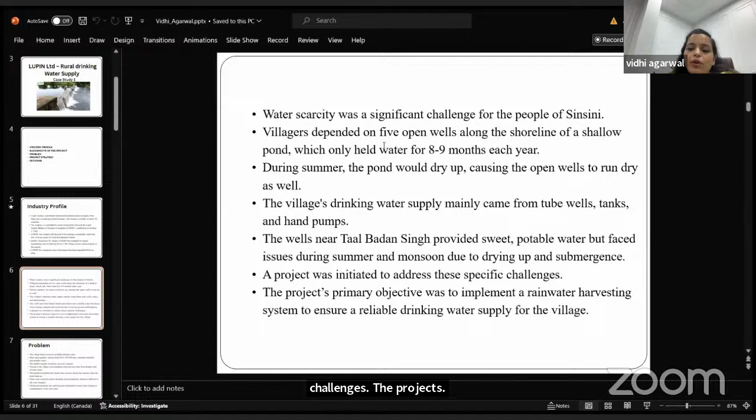The wells near Taal Badan Singh provided sweet, potable water, but faced issues during summer and monsoon with drying up and submergence. A project was initiated to address these specific challenges. The project's primary objective was to implement a rainwater harvesting system to ensure a reliable drinking water supply for the village. Overall, the project was started to help the villagers, because there was water just for 8-9 months, and for the rest of the months they had to manage by themselves. So Lupin took a great initiative for the villagers.

Now the problem was the village lacked access to potable drinking water. Most deep aquifers, ranging from 350 to 400 feet, contained brackish, non-potable water. The shallow aquifer would dry up every summer. Women in the village were burdened with carrying water from distant wells on their heads. The animal population also faced water scarcity during summer when the pond dried up. Open wells along the pond's shoreline lacked platforms, making it difficult to lift water properly. During the monsoon, the wells became submerged in the pond water, leading to contamination of the well water.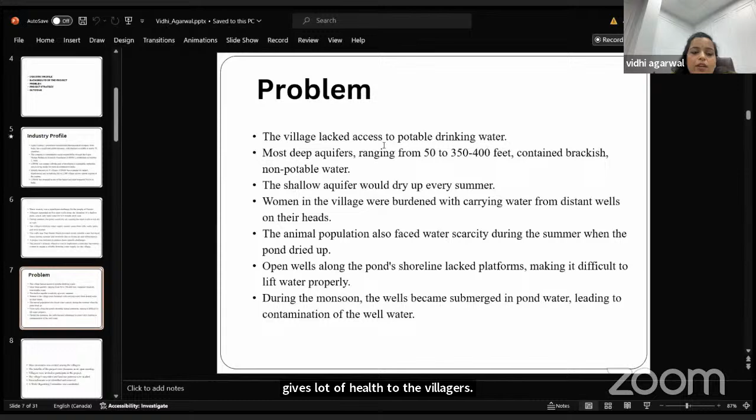So, being a pharmaceutical company, Lupin realized that contamination of water gives a lot of health hazards to the villagers. So they discovered a new phenomena. Next slide, please.

Mass awareness was created among the villagers through many awareness sessions. The benefits of the project were discussed in open meetings like the Gram Panchayat. They discussed these problems and invited villagers to participate in the project. The villages' amenities and land use patterns were studied, encroachments were identified and removed, and a work organizing committee was constituted. So these were the things about how they started their awareness sessions.

Project strategy, the material and the method used: the project was timely sanctioned during the dry pond season with encroachments resolved. Machine and village tractors were used for excavation due to labor engagement in farming. Indigenous technological knowledge was incorporated with dikes built to accommodate plantation. Open wells were raised, platforms constructed, and protective bunds added to prevent contamination. Wells were renovated and structural safety was ensured. An operation and maintenance committee was formed along with a women's SHG for water management and fundraising. A plantation with fish culture group was created for sustainability and environmental improvement.

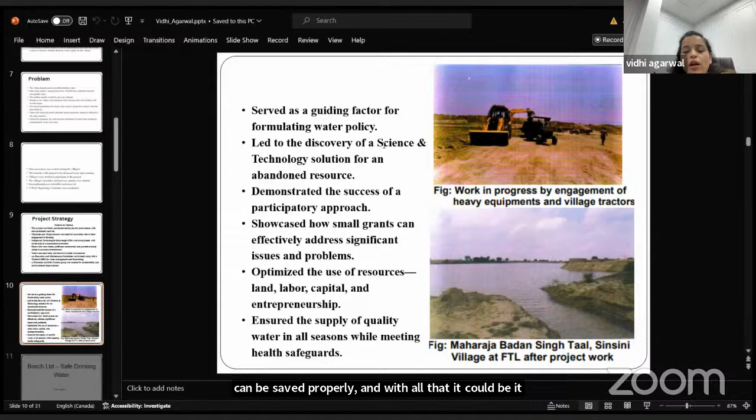Next slide, please. So my next case study is on Bosch Limited, which made the water safe drinking water.

Bosch is a Germany-based company. We all know about Bosch and use Bosch equipment at our homes. Bosch is the world's largest automotive technology provider with a turnover exceeding 45 billion euros. In India, it is a public limited company headquartered in Bangalore with manufacturing facilities at Bangalore, Nashik, Nagpur, Jaipur, and Goa. Its products range from diesel and gasoline fuel injection systems, starter motors and generators, special purpose machines, electrical power tools, to security systems. The company employs around 10,000 people and recorded a turnover of around 4,800 crores in 2008.

Jaipur is among the most severely fluoride contaminated districts in Rajasthan, where groundwater serves as the primary source of drinking water. As we all know, Rajasthan has very low water availability and comes in a dry region. So they started their project in Jaipur.

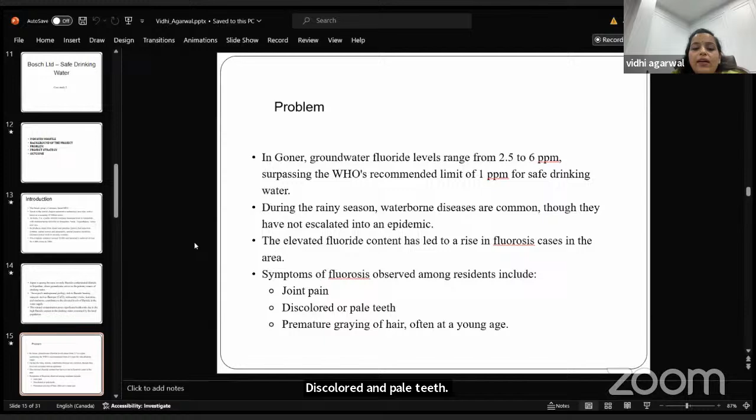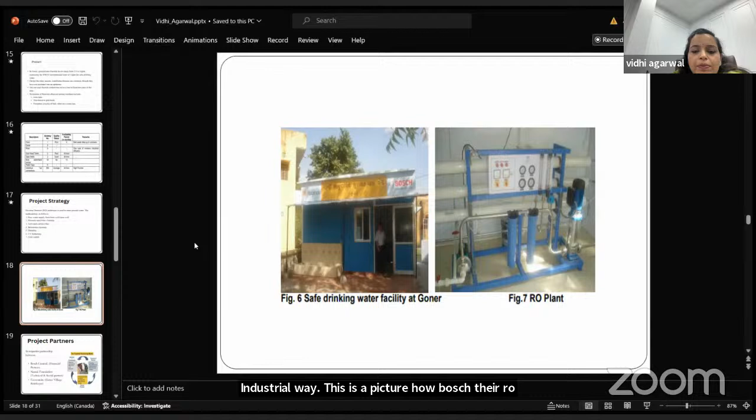So we all use Kent RO at our homes, but Bosch did it in an industrial way. This is a picture of how Bosch introduced their RO plant at Jaipur, facility at Goner, Jaipur.

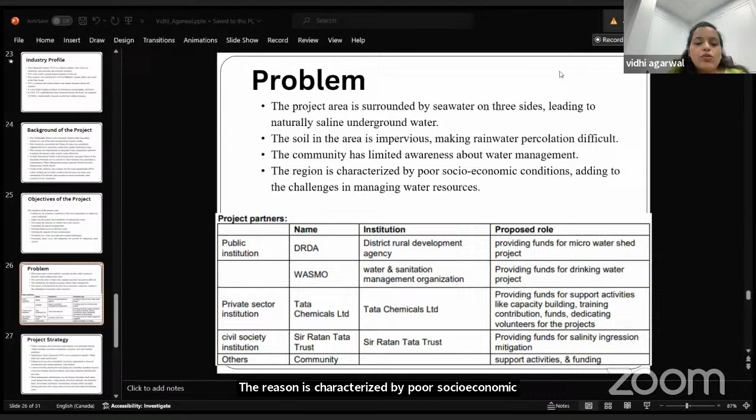These are the project partners, as you can see in the statistics: DRDA, WASMO, Tata Chemicals, Sir Ratan Tata Trust, community, and these institutions, as shown in the table.

The project strategy involved promoting awareness and communication and community participation through village meetings, awareness campaigns, exposure visits, and training programs. Participatory rural appraisals were conducted to identify village needs and create action plans. Village level executive committees, including representatives from all communities and women members, were formed. Capacity building training for user groups and committee members focused on account keeping, decision making, and project planning through pilot activities. Water management infrastructure was developed, including check dams, water storage structures, village ponds, diversion channels, subsurface dams, farm ponds, and bunds. Groundwater recharge efforts included recharge pits and wells, along with roof rainwater harvesting for drinking water.

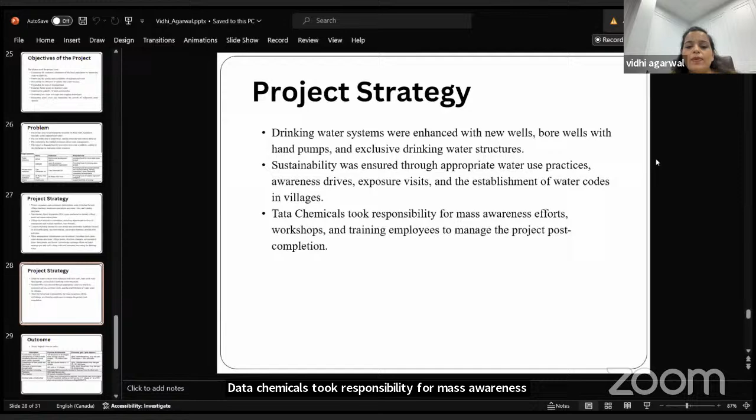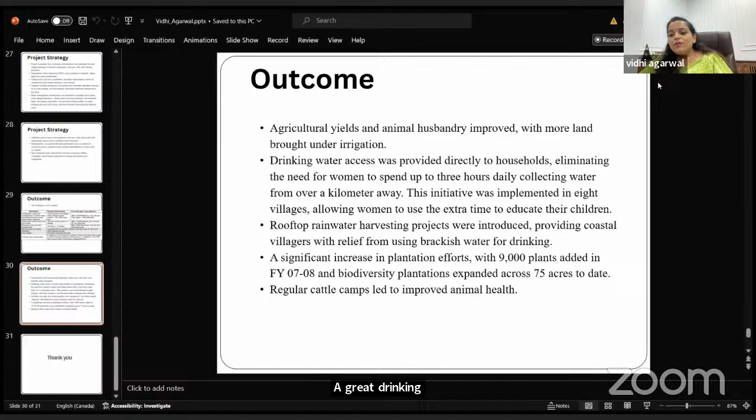I thought these 3 case studies must be heard by all, showing how leading companies contributed to climate change action, led to great drinking water access for villages, and helped in saving the country. So this was it.

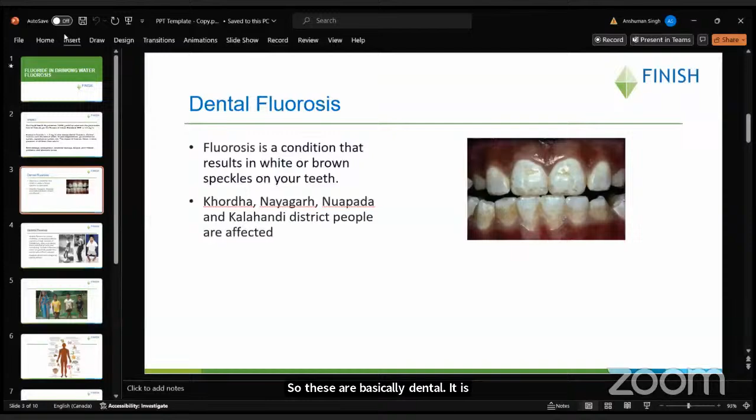Nowadays the fluoride is also passed to the animals, like domestic animals—cow, goat, and other things. It has also gone to the rice field, so in that area the rice is also having a high level of fluoride content. If we are consuming that, it also affects our human system.

We came to know that surface water is not having any fluoride content, even if it is less than 0.5 mg or something. So in that case, we thought that we will trap the surface water and make use of it for human consumption so that we can avoid the fluoride contamination part.

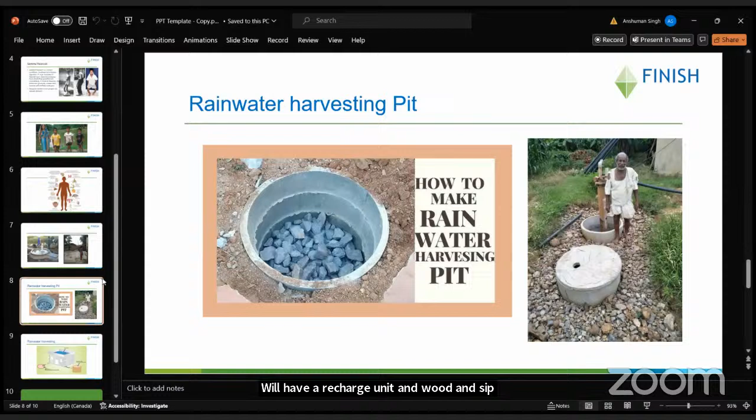Again, it will go and contaminate the groundwater, and this cycle will continue. So we cannot stop that. Only fluoride treatment through the natural process can manage this. We can dilute the groundwater by having a rainwater recharge unit or rooftop harvesting. We also use grey water, and that pit can be used too, so that the existing groundwater source gets a recharge unit and has good, safe drinking water.

This is the unit, the recharge unit, so people know this one. This is a simple and natural process. We can defluoridate our highly contaminated fluoride water using it. Thank you.